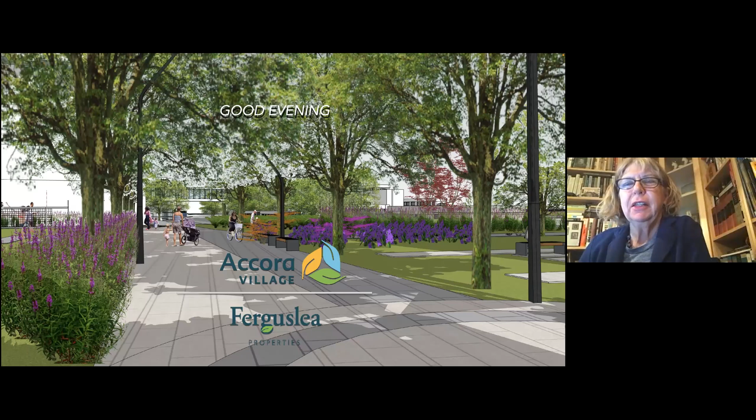And I always forget about that recording in progress, to wait till that happens. I'll start again.

Good evening, everyone. I'm Councillor Theresa Kavanagh, and tonight we're looking at a presentation for 70 Woodridge. This is being put forward by Ferguslea Properties. At this point, it is a proposal. It has not been submitted to the city. However, the planner from the city who's working on it is here in attendance very kindly, because this is not required for her to come, but she'll answer general questions in terms of process with the city. Any other questions would be for the team. And we have a team here to discuss what is being proposed.

So the way we'll work it, because of a significant number of people, we'll use the chat function, and we will answer questions. Statements will not be addressed. You can make statements anytime, but we'll pass forward questions. Everyone will be able to read statements and questions. Okay, so that's the process. But first we'll look at the presentation, and then we'll do the questions and answers after. So I'm going to hand it over to Sharon Ravsness, who is here from Accora Village, and she'll present the team who is going to discuss this proposal. Over to you, Sharon.

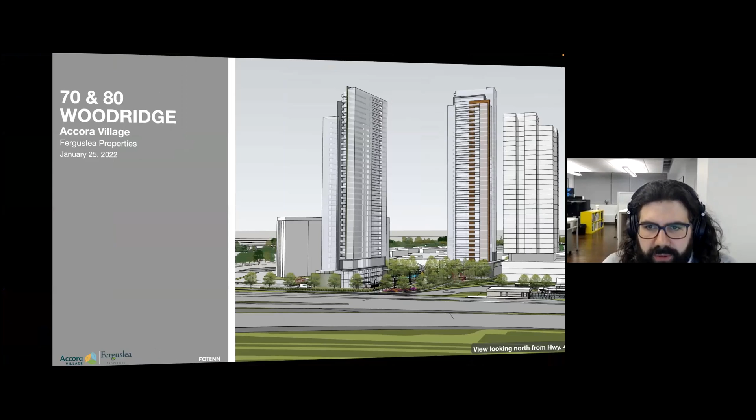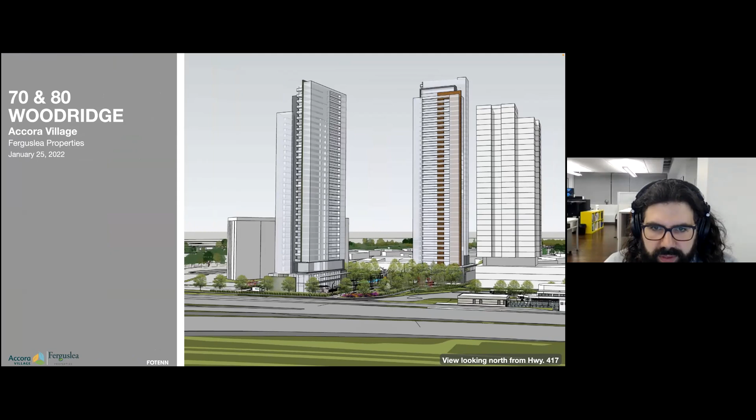Tonight, you're going to hear from our planners and our architects about the proposed project. We'll welcome your feedback and any questions that you may have. For now, I'm going to pass it to Tyler Yakachuk from Fotenn, who's going to talk you through the application process and the timelines. Over to you, Tyler. Thank you very much, Sharon. Good evening. My name is Tyler Yakachuk. I'm a planner for Fotenn Planning and Design, working on behalf of Accora Village, Ferguslea Properties. And as Sharon said, I'll be walking you through the planning and policy context process for the proposed developments at 70 and 80 Woodridge Crescent.

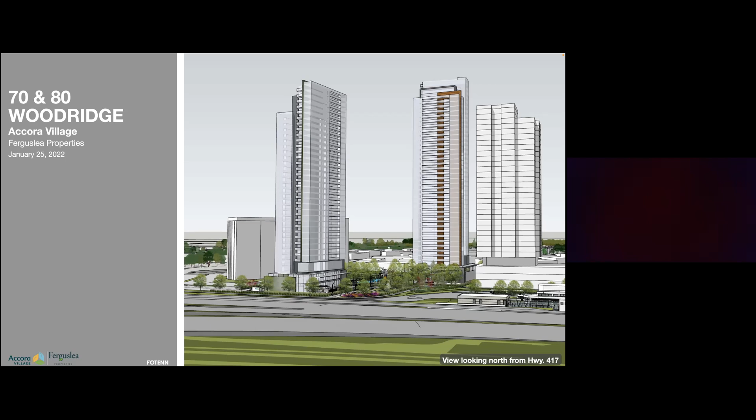Next slide, please. Just by way of presentation, Tyler, are you seeing this meeting is being recorded badge on the screen? I am, yes, top left. Yeah, okay, maybe we should try and get rid of that. It's just in the top left, it's not in the center of the screen? Top left for me, yeah. Okay, well, maybe we can persevere. Okay.

Okay. So, as I'm sure we're all aware, the specific area we are discussing this evening is the vacant area highlighted in blue on the image to the right that fronts the south side of Woodridge Crescent beside 19 Woodridge, the Cobalt building. The subject lands have an area of 0.89 hectares and a frontage of 63 meters along the south side of Woodridge. The lands are within 200 meters of the Bayshore transit station. The lands are presently zoned residential fifth density with a height limit of 34 meters or roughly 12 stories. To build the proposed towers, we will be seeking a zoning bylaw amendment. As indicated in yellow on the image to the right is 100 Bayshore Drive, which is presently going through a site plan approval to build a pair of towers, 30 and 27 stories respectively, directly abutting the development. Next slide, please.

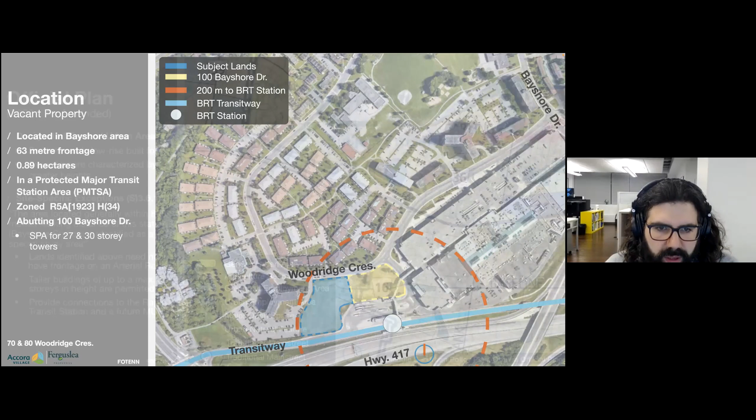Okay, looking at the planning policy in the existing official plan for the site, you can see the subject lands are located in the general urban area. Typically, development in the general urban area presents in a low-rise format. However, in areas of special interest or characterized by existing height, greater heights are permitted. This particular site is located within a site-specific policy area, which are areas of particular interest to the city with regards to guidance on future development.

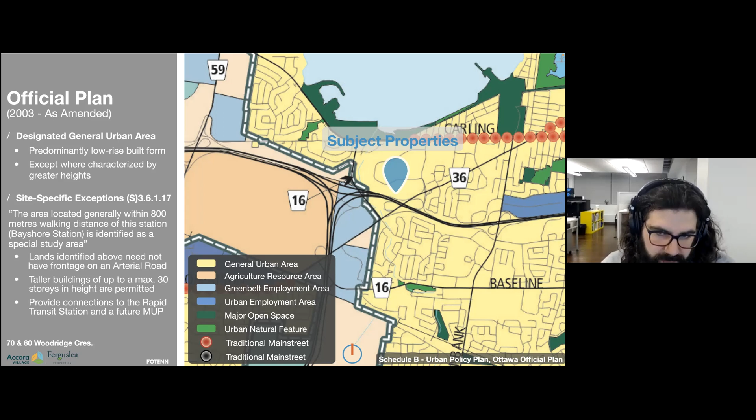The site-specific policy states: the area located within 800 meters of walking distance to the Bayshore Station is identified as a special study area where a secondary planning process will be undertaken by either the landowner or the city to determine the future land use, height, density, connectivity, and the overall character of the community, and which may be implemented through a secondary plan and amendments to the applicable zoning bylaw.

In addition to that, lands within the area need not front an arterial road to develop with greater heights. Woodridge is not on an arterial road. Buildings can be built to a permitted height of 30 stories, and connections must be made to the transit station through a multi-use pathway that goes through multiple sites on its way to the transit station. Again, we are proposing 40 stories in height, so we will be seeking an official plan amendment to permit the requested height. Next slide, please.

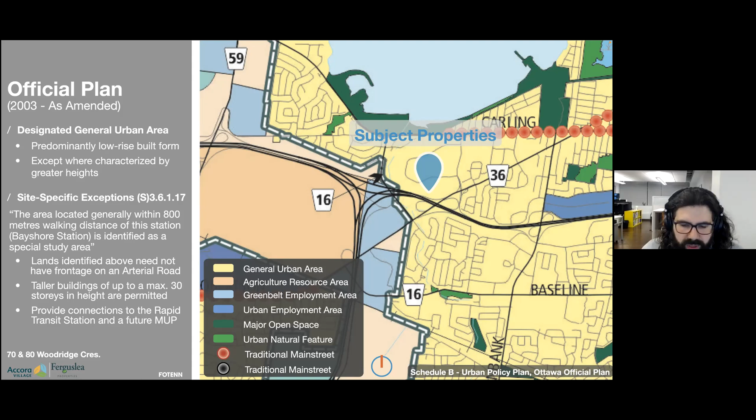Okay, so the City of Ottawa is presently in the process of transitioning from the existing official plan, discussed on the last slide, to an updated official plan. While the City Council has approved the new plan, it is yet to receive formal approval from the province. Until that time, the old official plan is still in effect, but we would like to cover how the new policies would affect the subject property.

Most importantly, under the new official plan, the subject lands will be designated as a hub. Hubs are areas centered around planned or existing rapid transit stations. The planned function of hubs is to concentrate a variety of uses and higher density of development. Maximum permitted height in hubs is 40 stories, which is what we're proposing.

Additionally, the new official plan still includes the site-specific policy for development within 800 meters of the Bayshore Station. And other requirements within hubs include commercial uses on the ground floor, a minimum of 5% 3-bedroom units, and once it has been passed by the City Council, inclusionary zoning. Next slide, please.

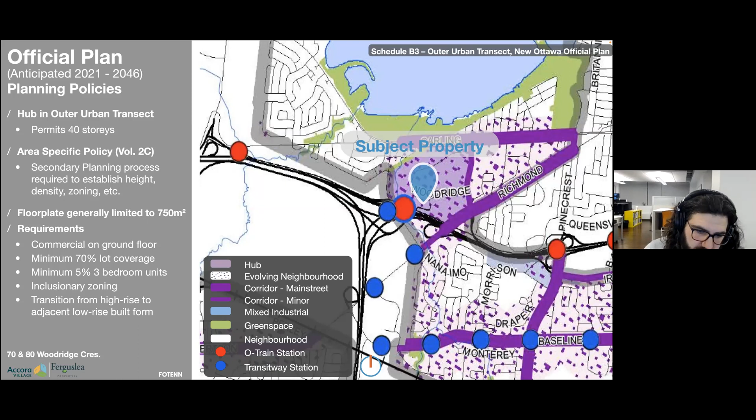Further to the last slide, here are some additional policies within the new official plan that support the proposed development, namely that the development meets the density requirement. It is in an area that is evolving to be characterized by taller buildings, and it is located within 400 meters of the Bayshore Transit Station. Next slide, please.

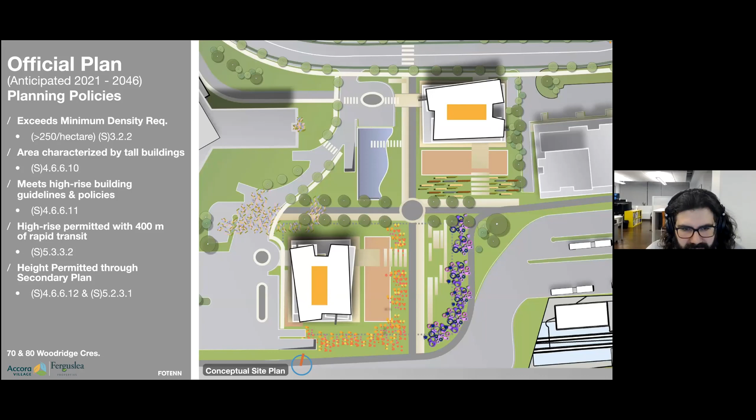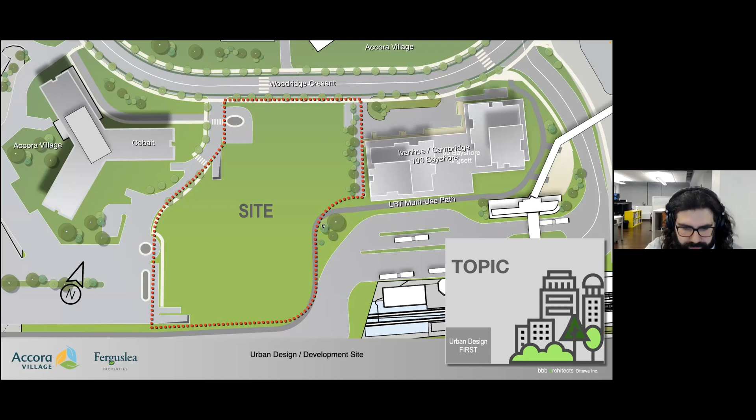Okay, so now I will hand the presentation off to Richard Brisbane to give a fully detailed discussion of both the design of the buildings as well as the exterior amenity space. Thanks, Richard. There we go.

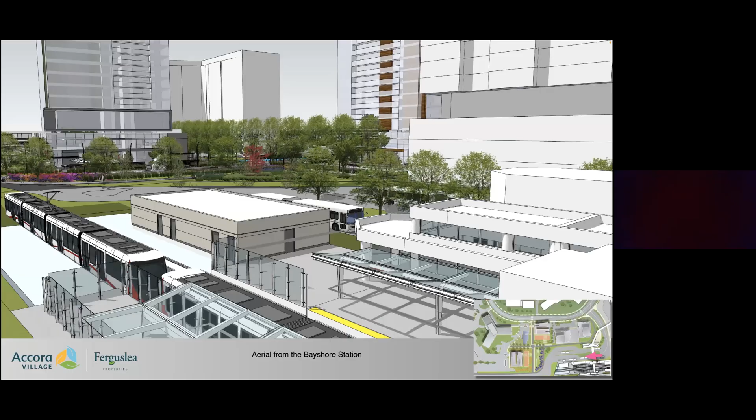All right, my job tonight is to give you a design overview. I'm going to start by talking a little bit about context, where the site is, its history, and where it's headed. Then I'll talk a little bit about the building attributes, the size of the buildings, the unit typologies, different uses in them. And I will end up on urban design, which for us is the most important topic here, because without a good urban design, the project simply will not be successful.

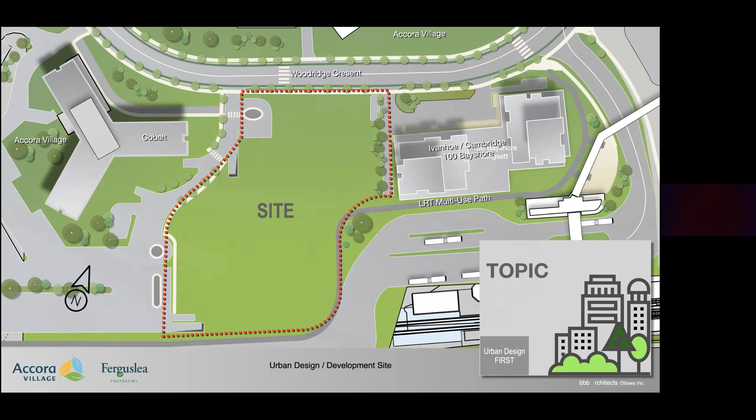By way of orientation, you're going to see a lot of these slides tonight. They're plan views of the site. That dotted area, kind of S form, is the site. And I'll be using these to talk about a variety of design concepts. And at some point, you're not going to know what I'm talking about. And if that's the case, the little floating square in the right-hand corner will give you some hint as to the topic. The other slide typology that you're going to see are images of the development like this.

This happens to be floating over the Bayshore Station, looking at the development. If you're looking at these and are somewhat confused as to what you're looking at, there's a small key map in the right-hand corner, and that will always have a pink arrow that will give you some orientation as to what you're looking at. There we go.

So if we start with context, an aerial photograph on the left of Accora Village. The green S shape is our site. The red dotted one to the east of that is our neighbor Kingsett Ivanhoe. Many of you may have seen that development. The site historically, at least for the last 30 or 40 years, has been defined by the Cobalt building, which is in the upper right-hand corner. And of course, Bayshore Shopping Centre, Cobalt's in the middle as well. And the bus rapid transit.

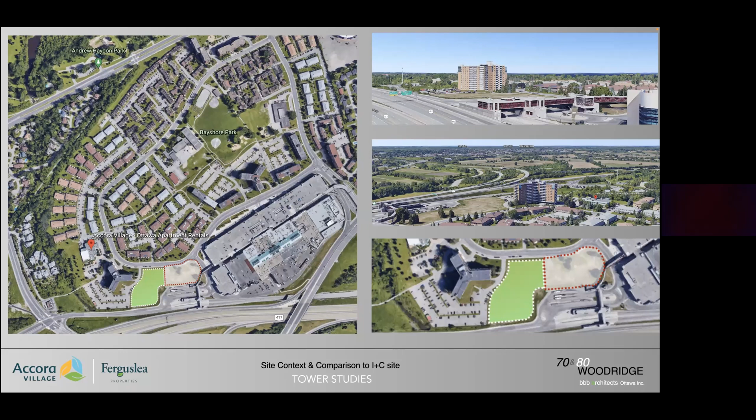This is a plan of those three components. So again, the Cobalt, the distinctive Y-shaped building on the left, which is some 50 years old. And as a building typology, it was truly suburban. It's a large floor plate building. It sits on a site. It doesn't particularly address the street, and it doesn't make any moves to define the landscape on which it sits. That's a pretty typical form for a 50-year-old building. And we have to remember Bayshore was actually suburban at the time it was built.

To the right of our site is our neighbor's development, Bayshore Kingsett's 100 Bayshore, and it's a much more urban design. So what you're looking at are the floor plans of it. It has a continuous podium, 2 towers. It's a very urban form, something that probably is more suited to downtown. It does define the streetscape. It has a 3-story podium, which unfortunately has parking in it. And the front of the buildings are largely hard surface for loading and visitor parking.

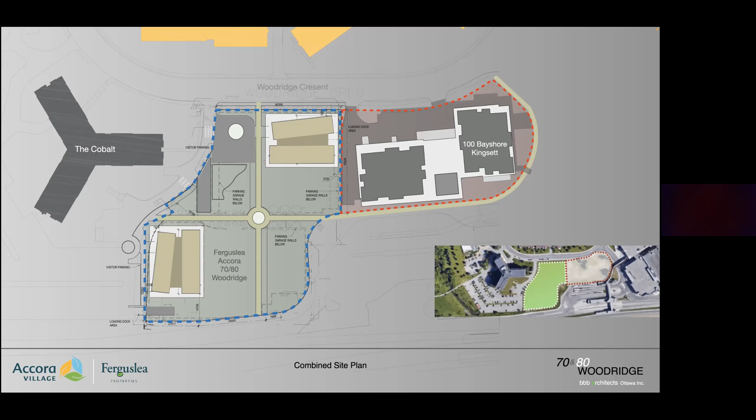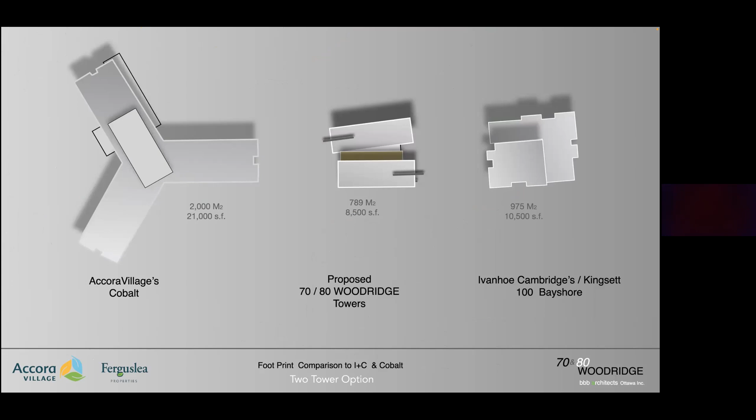In the middle is the proposed development that we'll be talking about tonight. And it has 2 towers, one fronting Woodridge and the other Cobalt. And as you can see, considerably more open space. Just a quick comparison of the kinds of floor plates, and this is sort of a historical difference as well. Cobalt is quite huge, 2,000 square meters. Our neighbors on the right-hand side, 100 Bayshore, are about 1,000 square meters. And our building is a somewhat smaller one at approximately 790 square meters.

Now you may wonder why that's significant, but as the height of buildings goes up, obviously shadows get longer, and the narrower the tower, the more nimble the tower, the smaller the shadow it casts, and the faster that shadow moves. It essentially moves like the hands on a watch. And at about 8,500 square feet, this is the optimum tower size that the city is encouraging on these sites now.

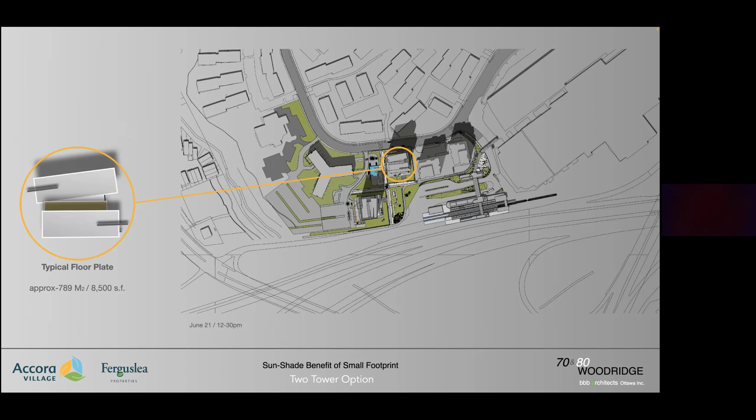With respect to the buildings, as Tyler mentioned, one is 40, the other is 37 stories. I think what's significant though is that both have a 2-story podium with community uses in, and we'll talk about that a little bit later on. On the left, again, is the typical footprint, and you can see a plan of the units above it. And on the right-hand side, we're just explaining the parking. Each building has a parking garage below it on 2 levels, which are actually linked, so it can operate as a single garage with a single point of entry. And there are approximately enough cars for about 0.8, almost 0.9 cars per unit.

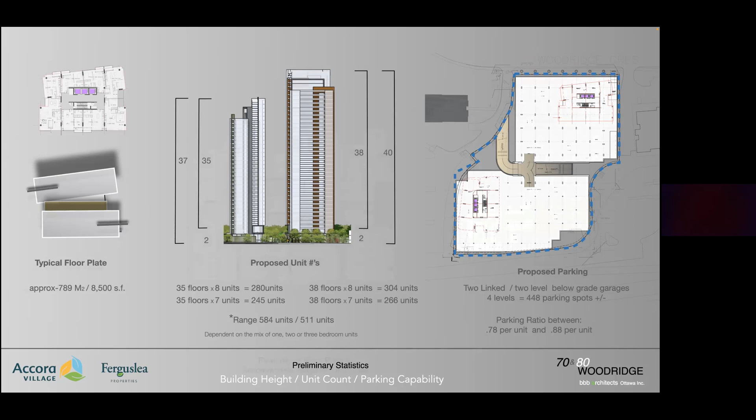And as you can see, there's a range of units between 584 and 511. The reason for that is at this point, the mix of the unit types has not been chosen. And so what you're looking at now is a floor plan of the building. It's a tight point block, and you can see the units around the staircases and the elevators. But what's important here is the client, Ferguslea, have asked us to design a building that can accommodate 1, 2, and 3-bedroom units of varying sizes, so that the building could be singularly all of one or a mix of these, or certain floors with certain sizes of units.

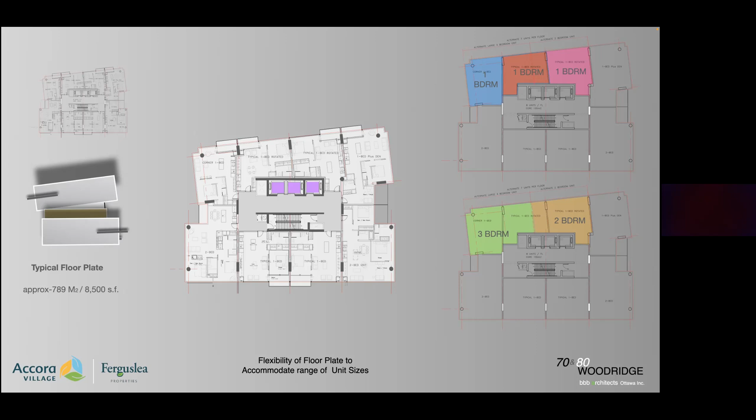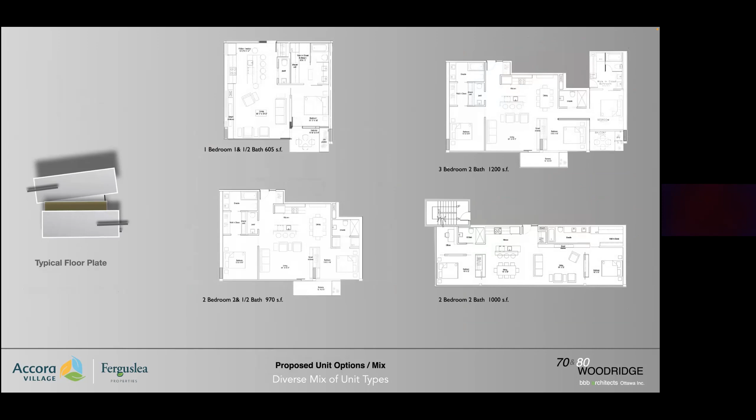And in addition to that, the unit sizes range from 1-bedrooms, which range from about 580 to 600 square feet, all the way up to 3-bedroom units, which are 1,200 square feet. So the building has huge flexibility in terms of the kinds of units and the kinds of tenants it can accommodate. I apologize for these slides. It's sort of urban design 101, but it's important to how we approach this site. And I'm going to read these from the left to the right in rows. And these are really the design principles around which these buildings were designed.

The first one simply says urban design first. And what we're saying is that unless we resolve the community context around the site, the buildings will never be truly successful. Moving to the right, macro acclimatize, that simply says that we have to study the placement of the buildings and understand the microclimate impact with respect to wind, snow, and shadows on the surrounding community, including our new neighbors to the east and obviously the existing Accora.

Radiate, use sustainable design practices. Really what that means is that we're trying to create units that have more than one frontage, that have corners, so that we can get cross breezes through them and different kinds of sunlight, more humane units. Lower left, scale and step. So the towers are pretty monolithic, but what's important with high rise is not so much what's in the tower, but how it addresses the street. What happens when the building comes down to the street? Does it reinforce and help define the streetscape? And does it have uses that promote the vitality of the streetscape? And we'll talk about that again.

In the middle is back to the parking, and it simply says that not only does the parking and the servicing have to be intuitive, but it should be as far away from pedestrian activities and any other amenity spaces as possible. On the right hand, we're talking about accessible. The City of Ottawa now has accessibility standards for indoors and outdoors. All of those need to be integral to not only the building, but the spaces around the building.

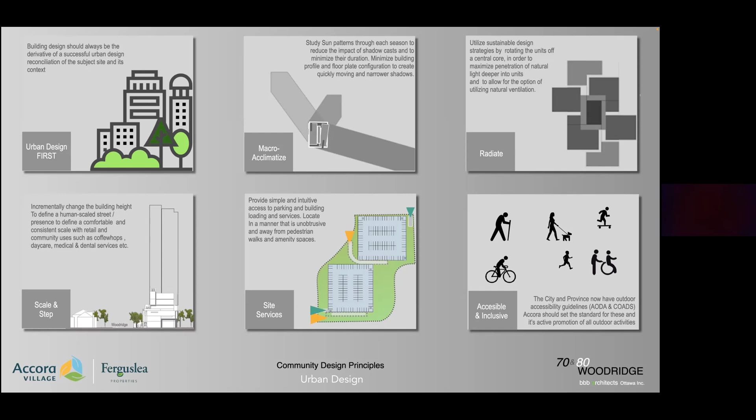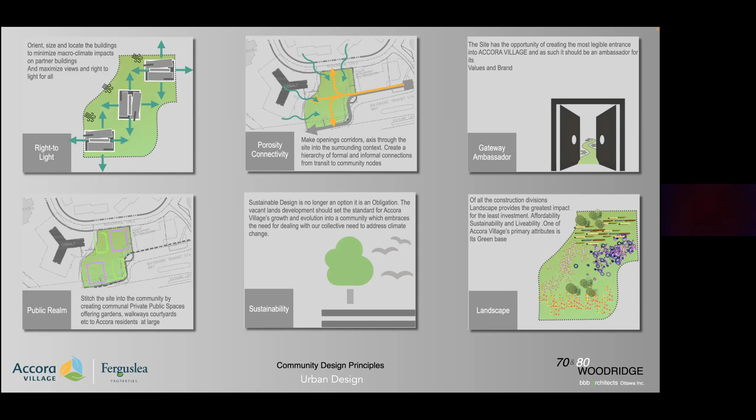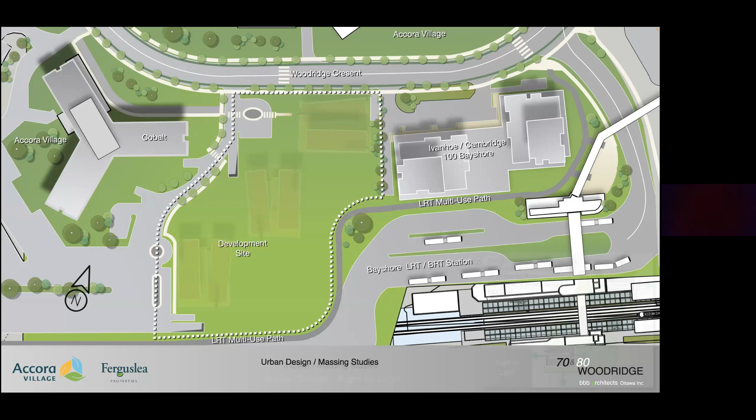So, urban design massing studies: why do we have towers located where they are? The simple story is that we looked at a number of different arrangements for towers. Initially, we thought 3 towers would be the optimum, but as we looked at all the other things we were talking about, the open spaces, the connectivity, et cetera, we felt that rather than having a 25 and a 30-story tower, perhaps if we went to 2 slightly taller towers, we could get rid of one and better accommodate the kind of urban design that we felt was more appropriate. So we ended up with a configuration which looks much like this.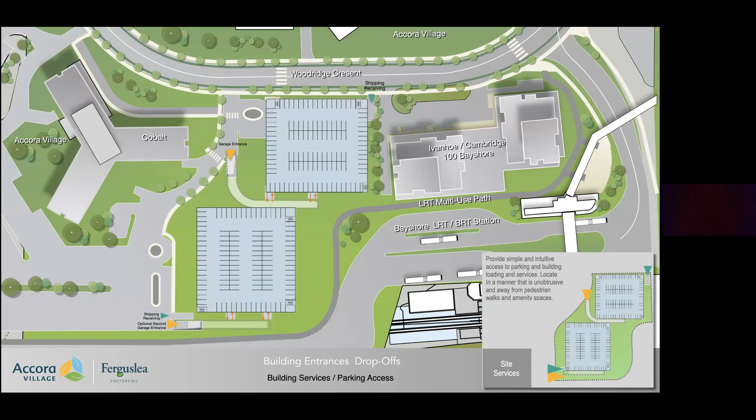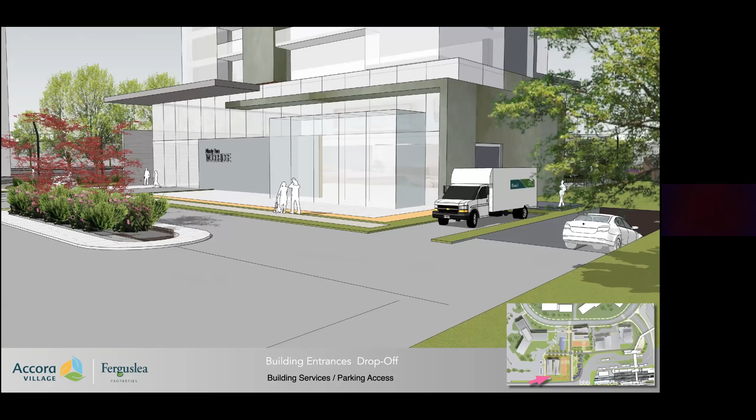And just to show you what that looks like, this is an image looking to the southwest, and you can see a car coming out of that parking garage. On the left, you can see visitor parking and drop-off for the northern tower, all taking place independent of Woodridge Crescent. Then over to the western tower, you can see shipping and receiving and a car going down into the parking garage. Since we did this initial concept design, I think we've determined that this second entrance into the parking garage is probably redundant and unnecessary.

So connectivity: how does Accora Village pass through the site? How do all the residents move from the community center? And by the way, nobody's mentioned, but there's a new master plan being put forward for the next 30-year growth of Accora Village. And so this site becomes a keynote for that. And so the question is, how do we do that?

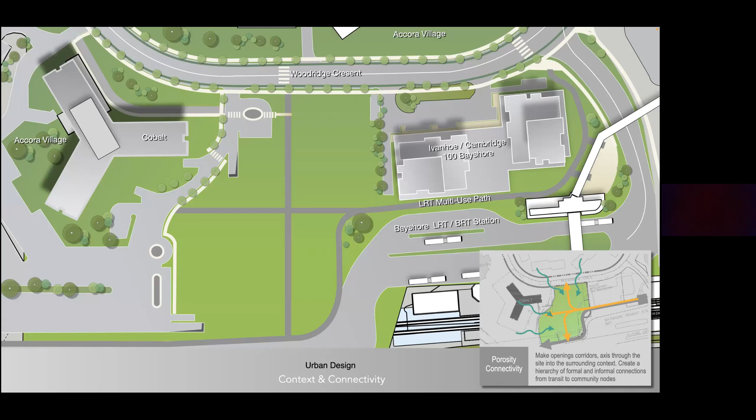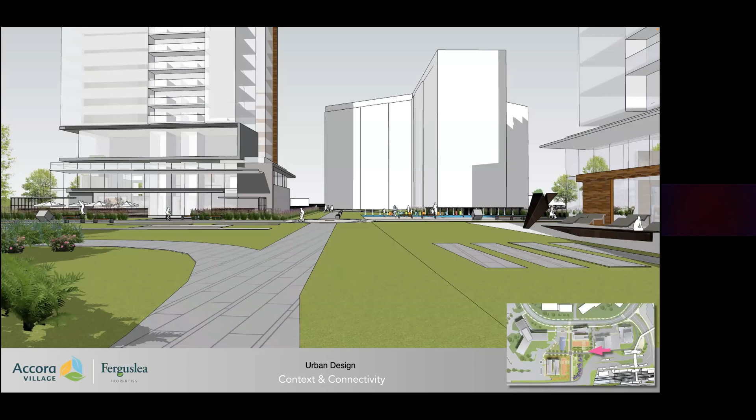And I guess the simple answer is, well, you put a path to the west and a path to the north and a path to the south and start connecting and providing as many options as possible. But obviously, a path in and of itself is pretty utilitarian. And we have issues like accessibility, multimodal scooters, bicycles, etc. And more importantly, we have issues of wind, microclimate, safety, lighting, places of respite, benches, etc.

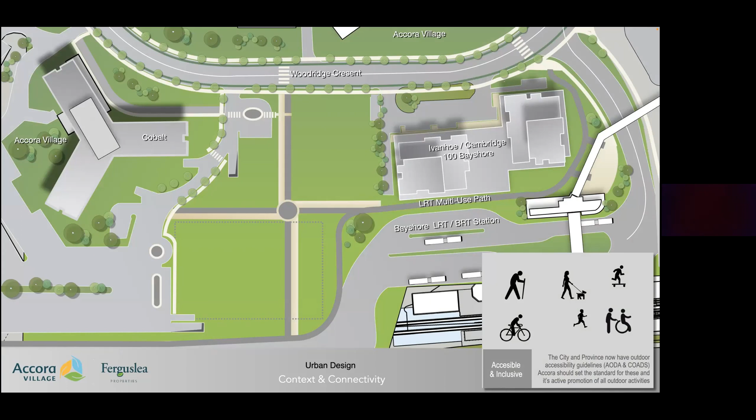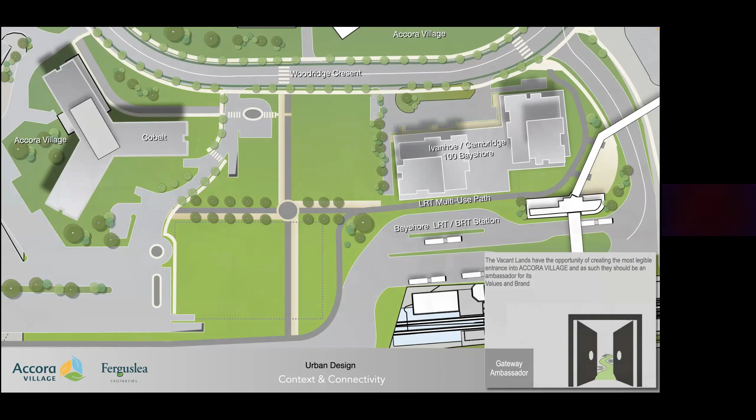And so the solution becomes not a utilitarian pathway, but in point of fact, a public realm, a set of boulevards or esplanades that cut through the site. And that ends up looking something more akin to this. So we're using trees and low landscaping to provide buffers to sun and to snow, and obviously to provide privacy and isolation from some of the resident spaces.

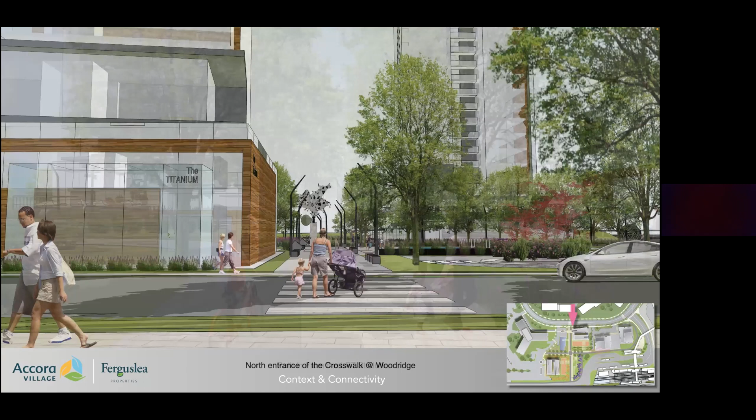This is the pathway looking from, as you approach from the LRT station into the site, but these pathways cross. So again, if you were on Woodridge and Accora coming into the site to get to the transit station, this is the crosswalk, the new podium to the Northern Tower. If you're coming from Cobalt and the second Western Tower, this is the axis that's passing. You're actually looking towards the transit station here, but you can see the colonnade of trees.

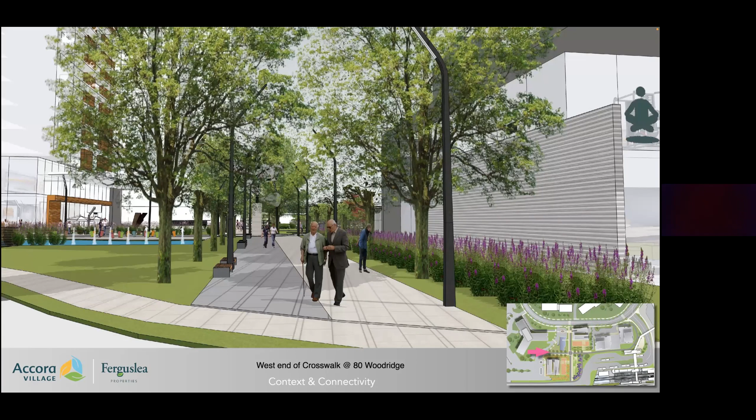And by the way, obviously these trees are mature, but this axis is the axis between the two lower parking garages. And so we have a deep soil mass here, which can accommodate trees. And then overall across the site, we will have a minimum of 900 to a meter of soil for all the landscape that we're showing you. And then if you're down at the MUP, which services along the Queensway and moves up to the LRT station, this is the view from the south to the north up to Accora Village.

So that's connectivity. Then the question is, what about the spaces? What can we contribute to Accora Village and the residents as they pass through these spaces? And that gets into the stitching of both privately owned public spaces and public realm itself. So these are what we call POPS, which means they're for the public, for Accora residents, but they're obviously owned by Accora Village. And they are to the northwest of the upper tower and the southeast of the lower tower.

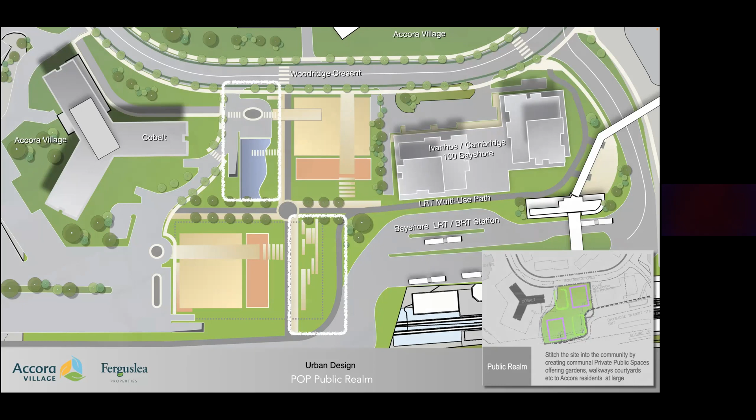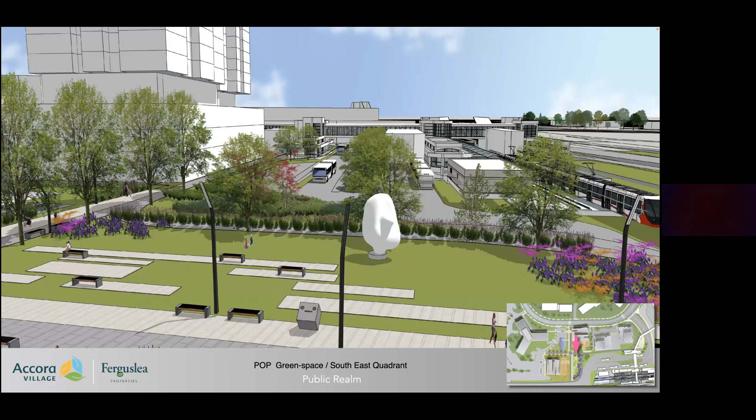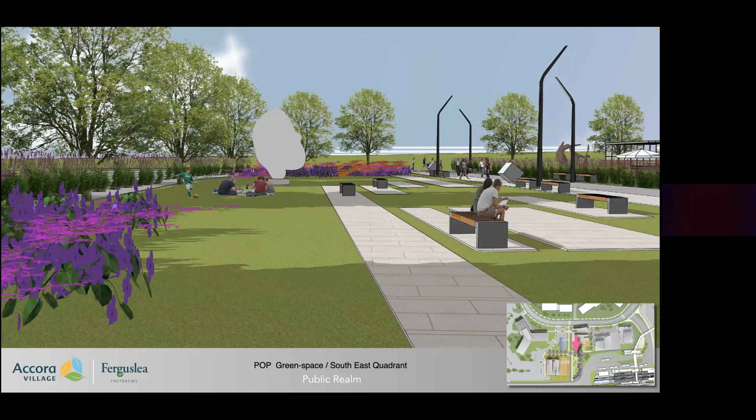And then looking from the other tower down, we have a more passive landscape, public realm space between the LRT station and ourselves. And that space is intended to be more flexible. So it's open, it doesn't have as many things in it. You could have a garage sale, you could have community picnics, it can host a variety of things. And obviously just passive amenity space as well.

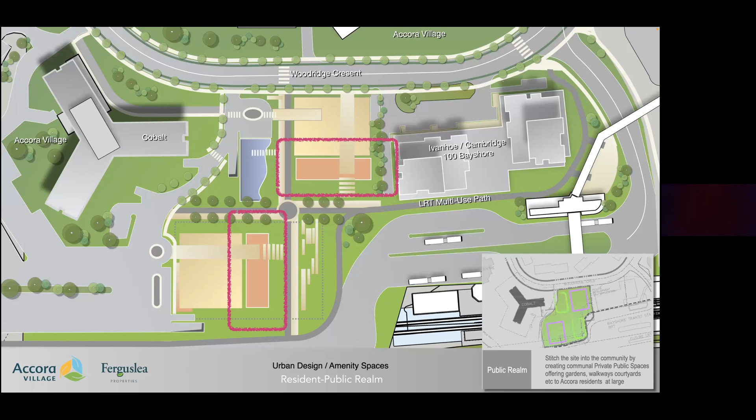We're going to have close to 600 units, population of 1,500, potentially 2,000 people, and they need amenity space themselves. So this is a resident space. This is on the Western Tower, just looking down. It has a terrace space with loggia, barbecues, plaza, probably a splash pad or a small soaking pool, chaise lounges, etc. for the amenity of the users of that building.

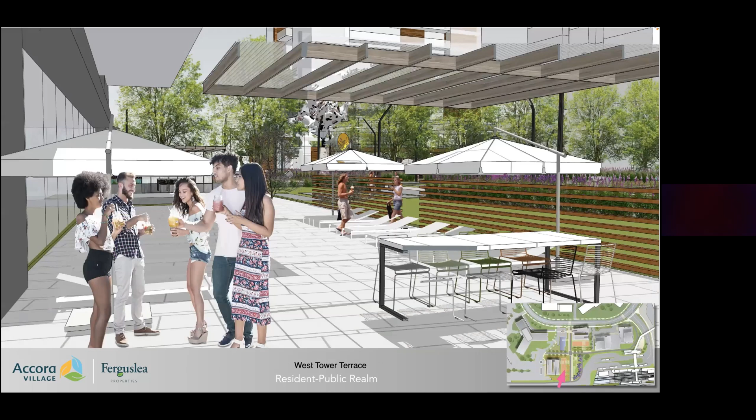And then if we switch over to the South Tower, we have an area that has both hard surface and green surface adjacent to their podium, which is likely to have a fitness center in it. And you can get a sense, the landscape and the trees are giving it a certain amount of privacy and a certain sense of less public, a little more semi-private for the residents of the towers themselves.

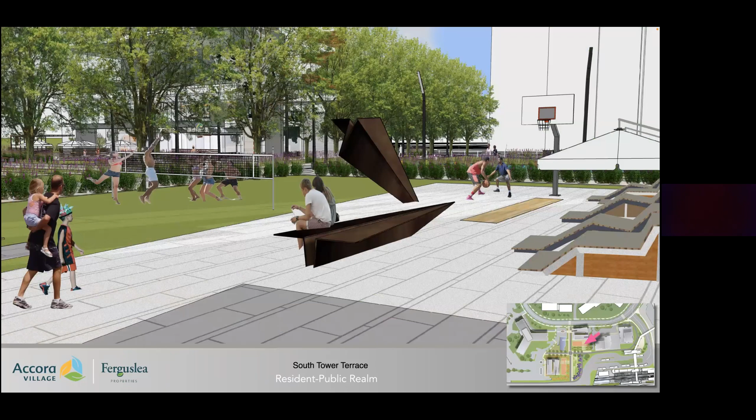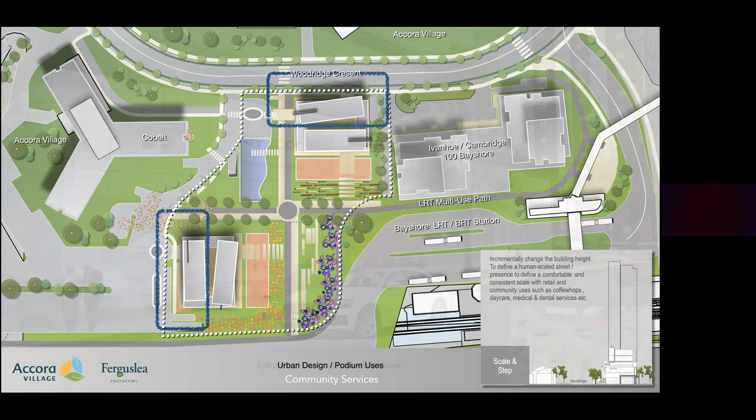Again, if you're not following me, the little box in the corner says this is about scale and step, and that's really how the building meets the street. What happens when these towers come down to grade? We have 2 podiums and 2 stories for each podium, and the intent of those is to house community services. So this is the Woodridge East Tower. This is the building you can see fronts the street, defines the streetscape. There's no parking or vehicular movement.

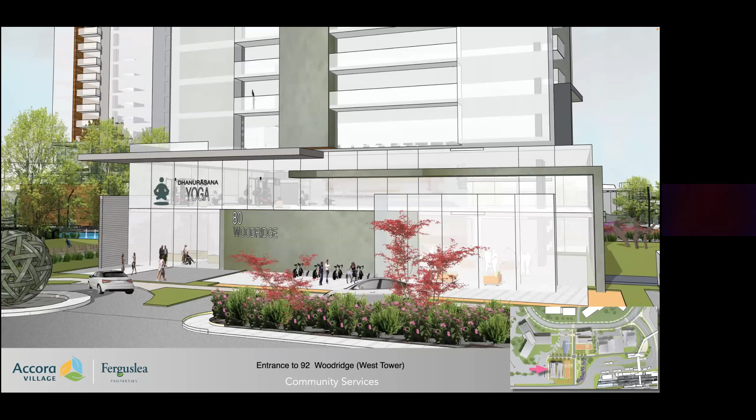And the idea here is you'd have optometrists, coffee shops, daycares, etc. Community uses that you can't find in a regional shopping center, but are appropriate to Accora Village. And if we go over to the other tower, again, the same kind of podium. In this case, yoga studios, fitness, again, medical offices, anything like that is appropriate. And the client is committed to, in fact, finding those tenants and housing them.

Last category, thank you for being so patient, is landscape. And quite frankly, in my business, I tell my clients that you can spend $100,000 in a building on doorknobs and hinges and it disappears.

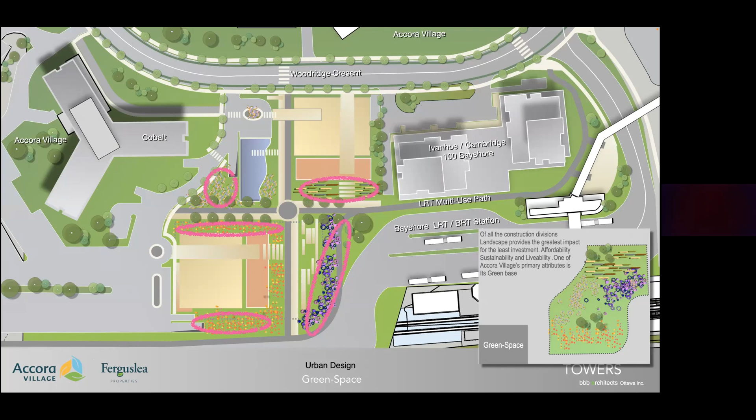You can spend $100,000 in landscape and it is transformative what landscape can do. We live in a city with 4 seasons, which means our landscape is so much richer than most. And we have great examples. People travel from around the world to see the Gatineau trees, to see Mosaïcultures. It is just spectacular, and we take it for granted.

And at little cost, we believe that we can utilize this for the microclimate reasons, but also just to enhance the beauty of the open spaces and to set a new standard for the Accora brand. So what you're looking at here is into that more passive space, the use of firebush and lavender and typical indigenous stone landscaping.

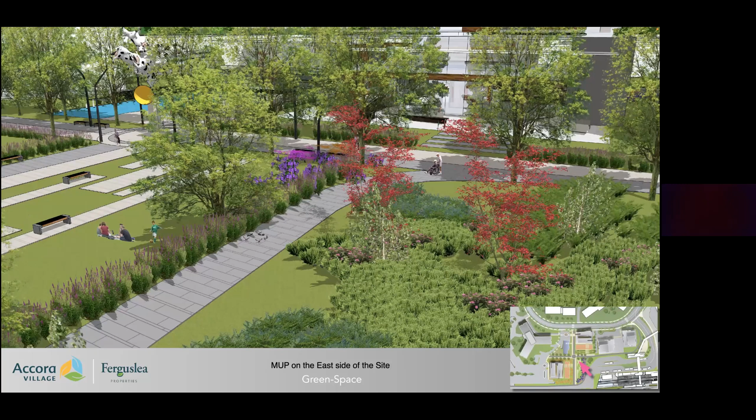Again, this is an aerial looking down. The multi-use pathway goes from the LRT station into our site and then drops down and runs along the Queensway. And this is the landscape between our site and the LRT, and just shows you what that path could look like. And ultimately, as you're moving through the crosswalks, north, south, east, west, utilizing the same landscaping to provide an intimacy, a windbreak, and just a sense of ownership.

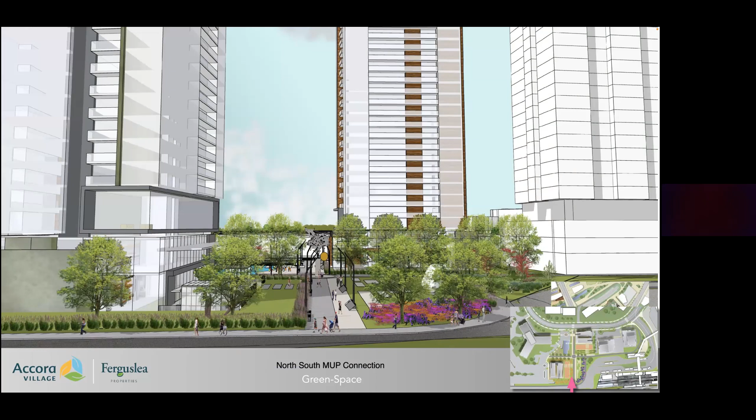Again, an aerial as if you're floating above the Queensway, just to give you a sense of what those axes look like. And then I'll just back out and move away from the buildings to give you a sense of what this looks like. Ultimately, you've probably heard that this is a gateway site. This is where the Queensway breaks and splits down to the 416 and continues out. And it is really considered by the NCC as a gateway as you approach the city.

And we'd like to think that these two towers are going to have the elegance and architecture to be distinctive, but more importantly, that the landscape and foliage at the bottom will help differentiate them from most.

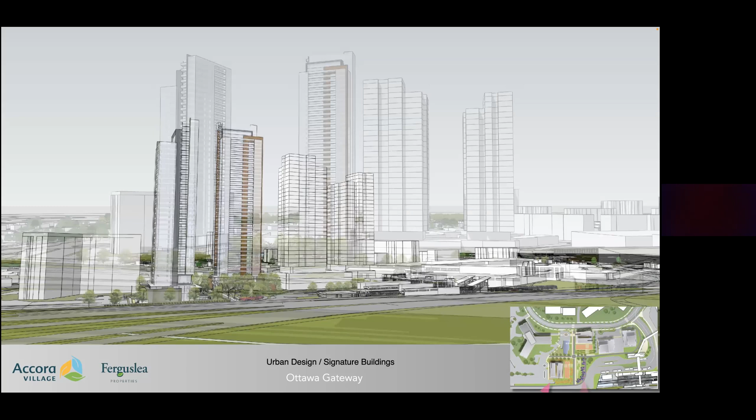Thank you very much for your patience, and I'll turn it over to the councillor for questions. Okay, there we go. I was not able to unmute myself, because I guess I dropped off from being a co-host. Thank you very much. I see that there is one question already. Hold on.

Thank you, Ian. And it's regarding the secondary planning process. How widespread will this process encompass? In the end, does such a plan arrive at identifying needs and wants for the entire surrounding area with widespread consultation? This is a process question in terms of, is there going to be a secondary plan? The issue is that this is one project. I've talked to the city about it. Their recommendation is that this is not a secondary plan process. But I'm going to pass it on to Laurel in case she has anything to add.

Thanks, Councillor. And yeah, that's correct. We're treating this potential application very similarly to that of its neighbor at 100 Bayshore, where they're exempt from the secondary planning process as required by the site-specific policy. That's also the reason for part of the official plan amendment, in that we're dealing with a single lot for development purposes. The rest of the land holdings in Accora Village under Ferguslea's name is much broader. It's much bigger. It extends north to Carling.